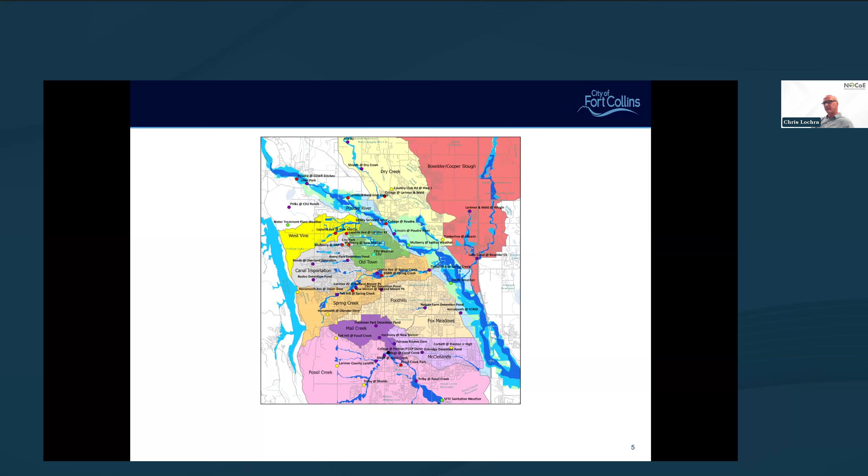Old Town had most of its natural drainage obliterated during its history of development, so we experienced quite a bit of flooding from that lack of natural drainages. Spring Creek suffered our greatest flood, sort of a modern record as far as life safety and damage is concerned. Next slide.

Just some example photos here from recent history. Old Town, the picture top left there, was a very common event for decades prior to some recent outfall construction and a $35 million infrastructure project for the collection system upstream of this area. Commonly flooded. Pretty much every rainstorm dropped something that would collect in Old Town, and this was the era of sandbagging and dam barriers for basements and lower level structures.

Then we're subject to lots of other types of events. As we enter the spring here, there's potential for rain on snow, which can trigger flooding very quickly for us. And we occasionally have events during the summer. We had an intense rain and hail combined event where the hail shredded vegetation so severely it blocked our collection system. Those are actually piles of hail you see in the bottom left-hand corner there. So we occasionally have these unique storms. Our design storm is a 2-hour event, front-loaded, 3.67 inches for our master planning efforts. Next slide.

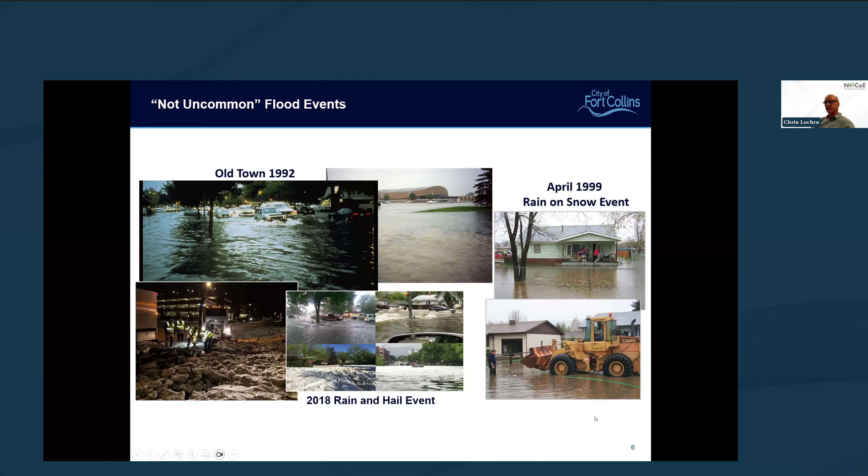Our significant modern flood was the 1997 Spring Creek flood. This was a year's worth of precipitation falling in about 31 hours from a cell that stacked up on the flank of Horsetooth Reservoir right at the top of the Spring Creek watershed. This resulted sadly in 5 deaths and ultimately $200 million of damage. And we had no alert or warning system at that time.

The National Weather Service radar underpredicted that storm's depths by about half, though they were very accurate for other cells that developed in this overall event up and down the Front Range. Droplet size and some other factors confounded their estimates. So it was determined we had to get some real-time measurement in, and in 1999 we started our effort to grow an alert system. Next slide, please.

In 2013, we had a major riverine flood, and this followed fires in 2012, where a good portion of the lower mountain watershed burned. We had terrific amounts of debris in our channels all through 2012 and into early 2013. Then an unusual set of meteorological circumstances resulted in lots of flooding from Golden, south of Boulder, northwest of Denver, all the way up the Front Range, with the smaller communities in the foothills devastated. There were road closures and damage to structures. We had to do realignment of Highway 34 in the Big Thompson Canyon.

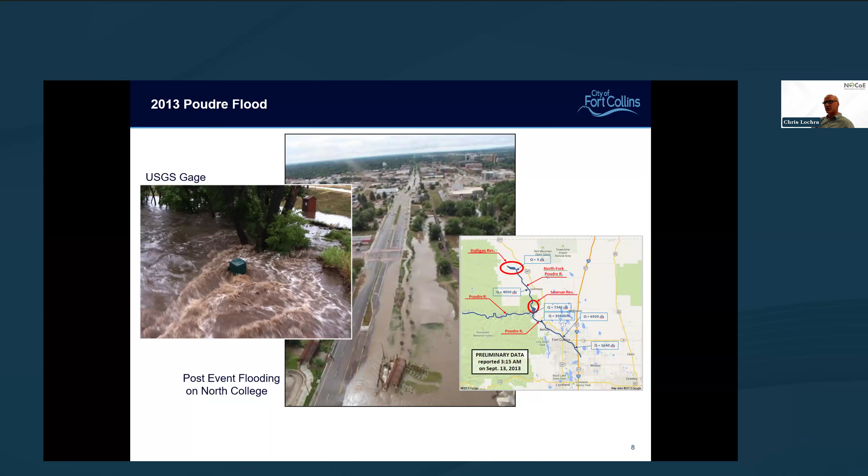This was a major flood that in Fort Collins we actually prepared for. We had an exercise in the spring because of the concerns about debris and the augmentation of flood flows. We exercised this with a multi-agency effort gathered at our performing arts center downtown, and I think it served us pretty well for the awareness component for this storm that happened in September. Next slide.

Then in 2020, we had very significant fires in our mountain watersheds. Pictured here is the footprint for the Cameron Peak fire extending from the Continental Divide on the left all the way to the Front Range here. Superimposed on that are the 2012 fires of Hewlett Gulch and High Park that you see in darker shade. About 70% of our mountain watershed is now in a fire recovery situation.

I might add, the East Troublesome Fire, not pictured here, flanked this fire to the south, extended over and threatened Estes Park and Rocky Mountain National Park. Combined, the 400,000 acres burned are the largest wildland fires recorded in Colorado history. Next slide.

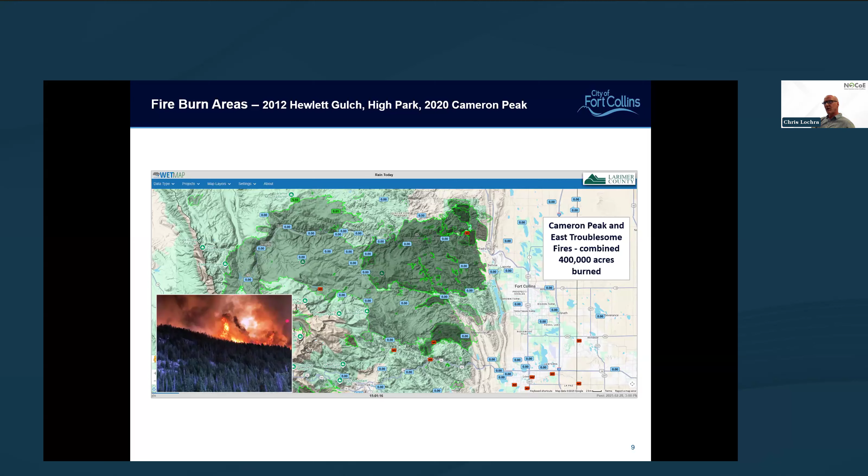Those fires drove significant changes to the behavior of the mountain watersheds, and we worked with the National Weather Service to raise the sensitivity of the triggers for any advisories, watches, warnings for flash flooding in the mountainous part of the watershed, all the way up to just a third of an inch in 15 minutes and half an inch in 30 minutes.

And from the burn area assessment reports that came out after those fires, we saw 10 to 30-fold increases, depending on the size of the subwatershed, in the peak flow expected as runoff, and it doubled for a 100-year event for the overall watershed. So that would mean instead of about 13,000 CFS, we expect in the low 20s for a major event over the burn scar.

So how do we measure these things? Well, as you'll hear from other speakers and through the series, but certainly today, we have an alert system that was started in 1999. We have rain and stage measurements on all of our drainage features, including detention ponds. We have a number of irrigation ditches we have to monitor that can translate water from one subbasin to the next. We also have some automated functions.

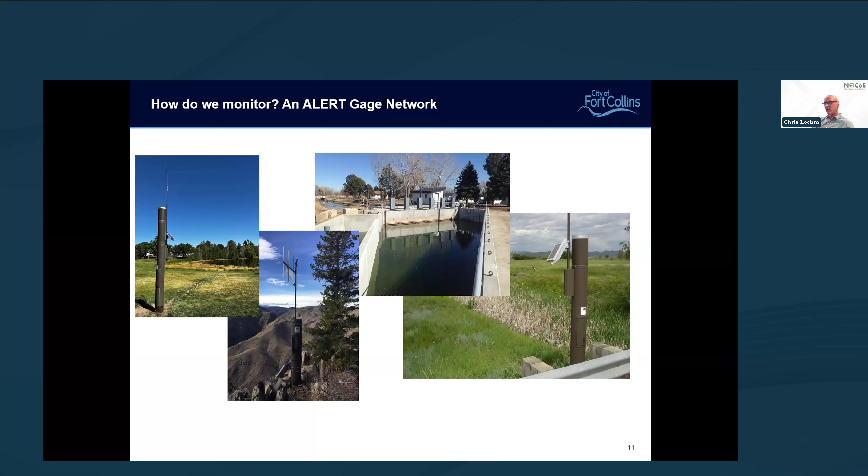And we also extended the early warning part of the early warning system approach or philosophy. I put some gauges into the mountain watershed that the county now, after the fires, has extended much farther up, all the way to Cameron Pass. But that meant putting in some repeaters because we still have basically a radio telemetry for most of our system, a couple of major repeaters, and then probably over 100 gauges now between the county and the city. Next slide.

So how do we prepare for our storms? Talking mostly today about our process. We rely heavily on the National Weather Service. We have an intimate relationship with them. This is a picture of a little tour we did to the Boulder Forecast Office. We can call them obviously during events. They receive our alert data, so they can truth their radar against the measurements from our alert system.

They scheduled Monday morning briefings immediately after the fires. They were weekly through the summer for advance notice to our emergency managers about conditions from the burn scars, since we have emergency managers from Estes Park and the various counties, including Larimer County and Boulder County and Grand County as well, Jackson to the west even. So this is a very good service they offer us.

We also look at the flood threat bulletin the Colorado Division of Water Resources offers. That's some probabilistic modeling we can look at for expected precipitation totals, sub-kilometer kind of resolution. That's very helpful for us. That's published in the morning, beginning May 1st, and then updated in the early afternoon, which is important for us because a lot of our storms develop in the afternoon. Next slide.

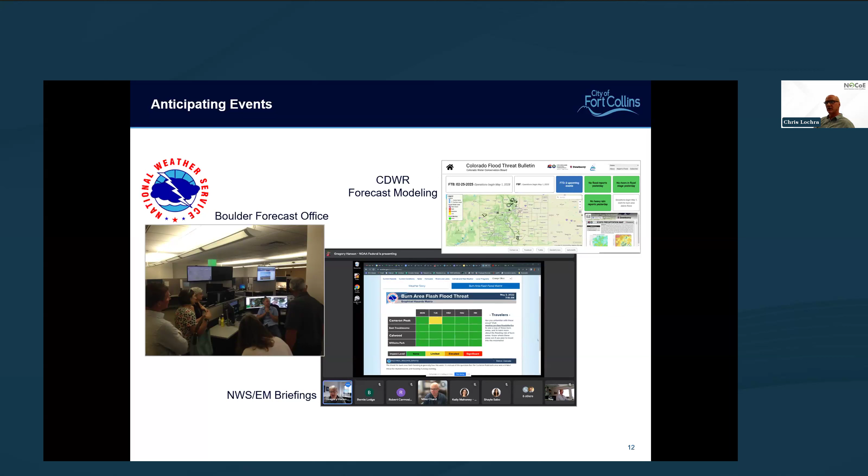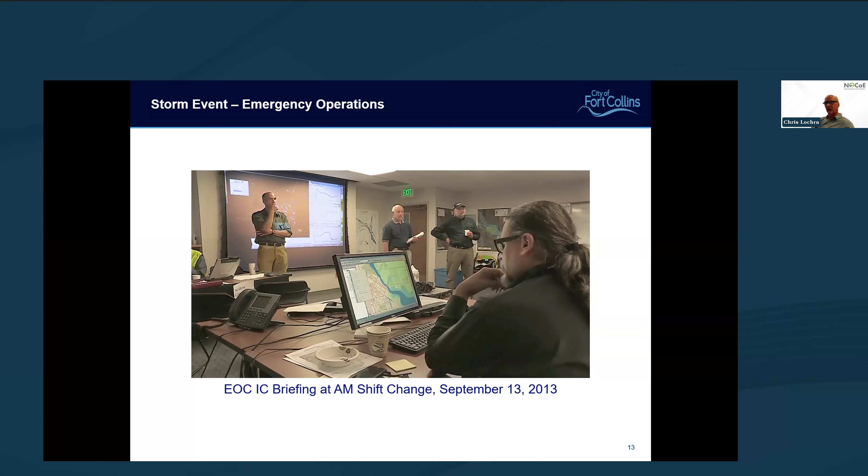Then we can stand up, as this is a shot from 2013, a physical incident command post or EOC. We have permanent ones, and we now have one located downtown under our city manager's office; we moved our emergency management representation out of Poudre Fire and into a civilian department with the city. But we'll stand up a physical DOC if given enough time and severity of an event, and duration, obviously a big issue. But we work virtually prior to co-locating physically. And I'll talk a little bit about our flow process. Next slide.

The software we use is Contrail. That's the data management software we're using, and we have some dashboards set up for displaying severity of alarms for various sensor types. And then we can overlay some weather radar imagery, some reflectivities, over that to corroborate storm behavior with stage or rain totals.

And then we rely on some other software for more up-to-date sweeps. We use Weather Sentry for a pretty up-to-date, no more than 5-minute delay radar sweep of development through town here. And we use Weather Message to capture those National Weather Service bulletins and messages and to distribute those to our emergency responders. Next slide.

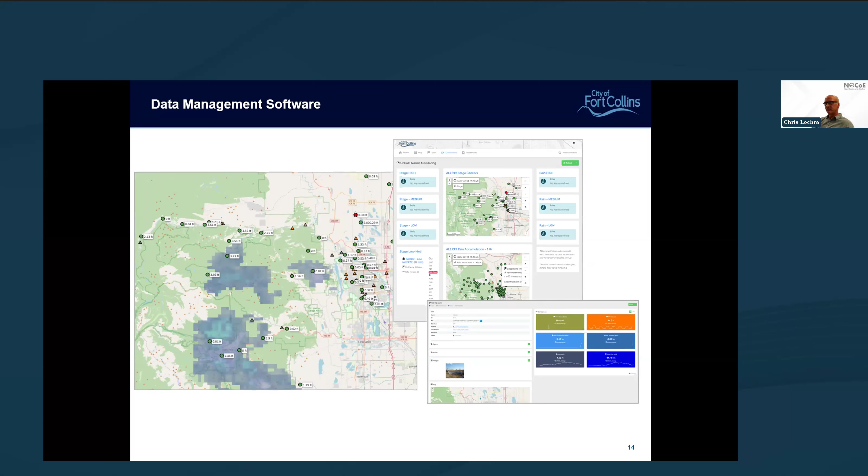And that person is the point person for receiving any kind of messaging from the system. And then they will work directly with water field operations crews here in utilities and deploy them as needed based on action items from our emergency action plan.

And then we can expand that process, that arrangement, that structure, of course, as the severity grows or duration lengthens as needed, and we can pull in leadership and management to actually manage as we break into, say, multiple crews and deploy more resources to the field, and then delegate more of the expectations and requirements of the on-call person or the incident commander initially as the storm develops.

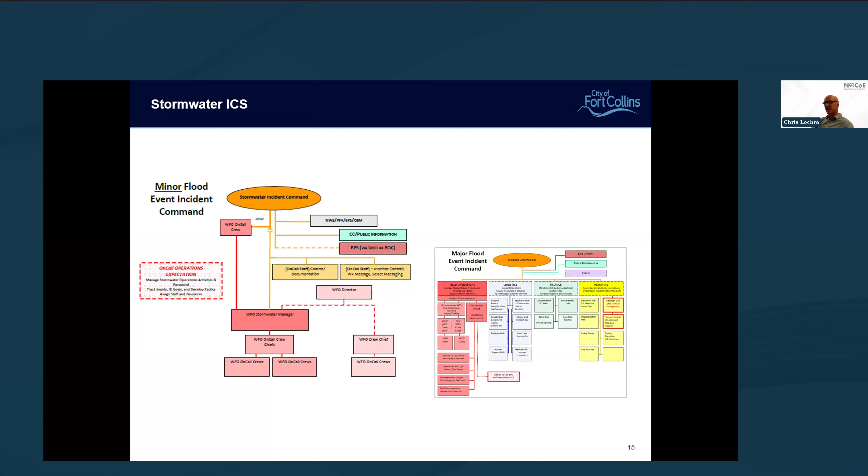And then I've got a picture of sort of a fully fleshed out ICS chart. We've all seen these. And in this case, the stormwater group that we're in, the on-call group, will be moved into a field operations or the operations section for a larger event, with also a footprint over in the planning section for development of an incident action plan. So this is kind of a dynamic, flexible approach that we use. Next slide.

We have emergency action plan links to those. We also have a couple of levees in town we have to maintain and monitor, one protecting an older, low-lying part of town, another protecting our water reclamation facility. And this book contains essentially all the reference information for flow in the river, timing.

We have bridge infrastructure information there, and we have access to prescribed polygons that we've established for notification should we need to push something out for flood polygons in various areas that are subject to flooding. Next slide.

Can't stress enough, we're all aware of the importance of our relationships with other agencies. You know, we work closely with the other departments, streets, our parks. They all have their own call teams. They have rangers and they have on-call streets. So we'll work laterally with those groups for any kind of response operations. We have our Customer Connections group.

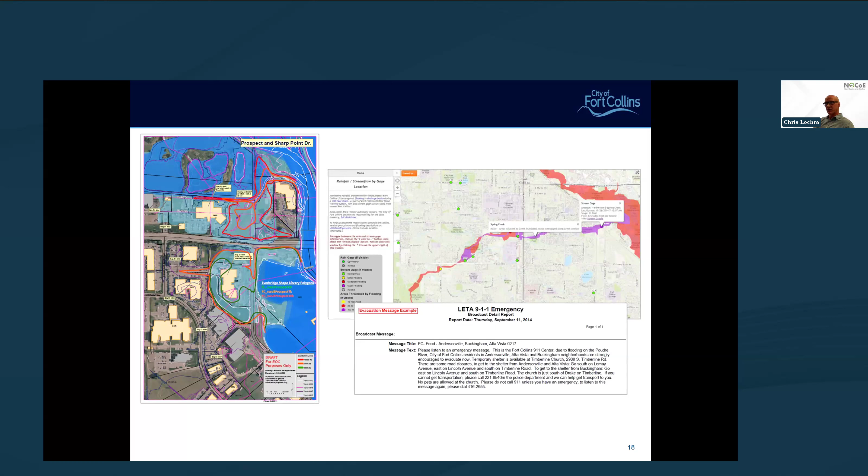And that has polygons that will automatically populate given significant flooding, that shows both Spring Creek and the Poudre River being activated. This is just a test shot, so to speak, I think for our CRS documentation. This wasn't a real event. And then the crafting of messaging. Like I said, we have most of these things pre-prepared. They'll be looked at and breathed upon, depending on the event. We're trying to basically reduce the response time, get things out as quickly as possible. Next slide.

Then we have graphics, of course, we capture the radar reflectivity, radar imagery, and our rain totals, and any information we can compile after the event for after action review, and then summarize that as a freestanding document. Or sometimes if it's just small events, I'll summarize them in an annual report that I'll publish for the water year, and include in that how our system performed and documentation on the data itself and some analysis, and then also sort of how our on-call team performed and how our response went for these events.

So that's the core of our deliverable as far as our process for the city, as far as what we offer in our flood warning and flood management program here.

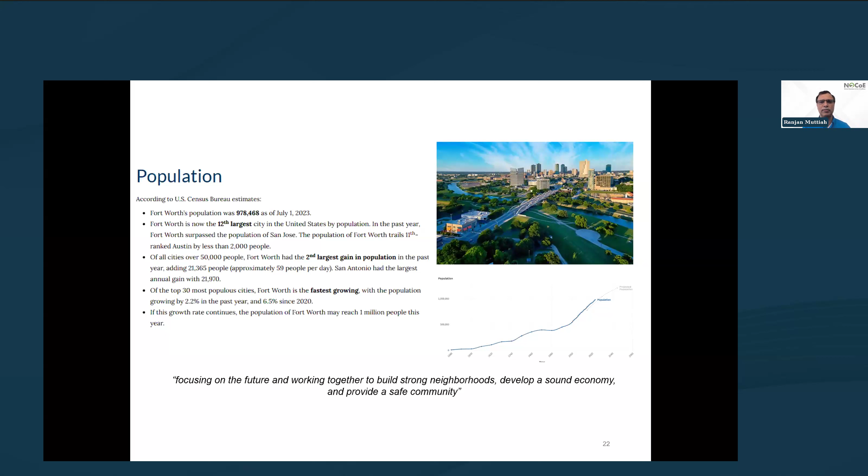One of the visions we have is to make Fort Worth a safe community. So flood safety is also an important part of safety in the city. Next slide.

So our stormwater utility, which funds my position, was formed as a result of severe flooding in 2004. This was a citizen-led initiative. There was chronic flooding, and then the utility was formed in 2006. The utility is funded by the impervious cover.

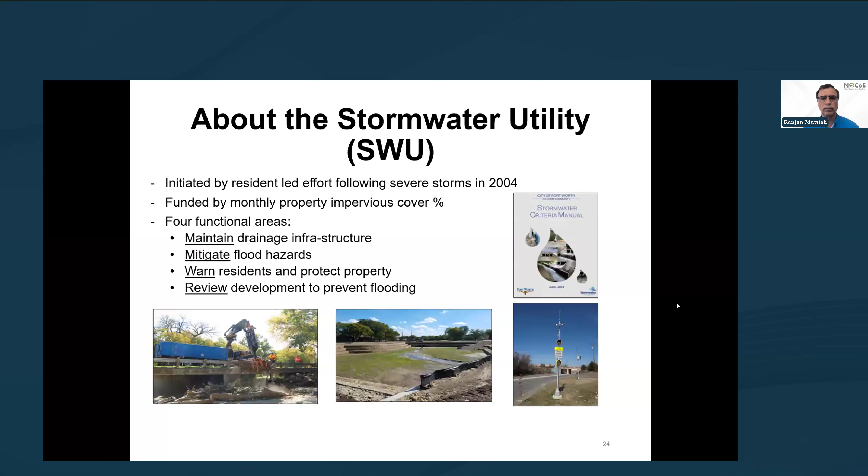So a short history. Since about the late 90s, we've had about 20 fatalities. Nearly all of them have been road fatalities related to floods. And so in 2000 to 2002, we had 3 fatalities that led to 3 test locations. Those were funded by city funds. Then in 2004, the one that I referred to earlier, we had more fatalities. We installed a flasher network through city bonds. And then we located these sites based on prioritizing all the hazardous locations. We prioritized up to 285 from 1,500 locations.

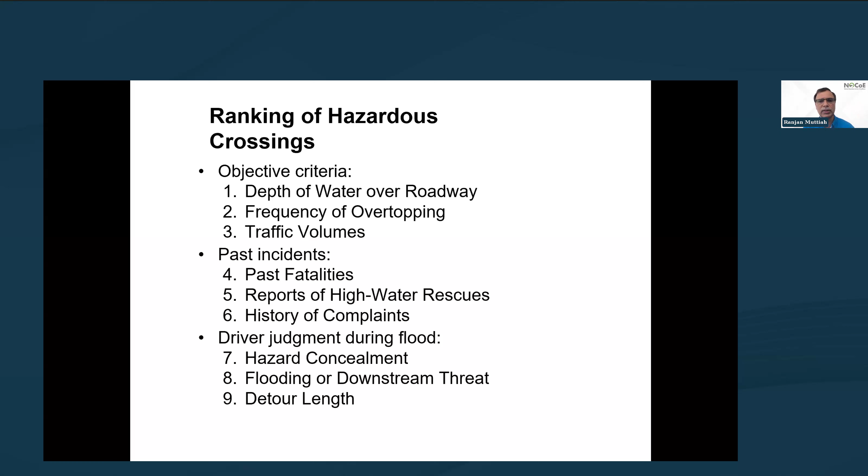So around 2018, we kind of did a reset and looked at our flood warning network and how we could improve it. One of the improvements that we made was to upgrade from Alert to Alert 2. I'll briefly mention that later on. And then we also looked at what we really need in terms of getting an early lead. And one of the things that we identified is we really need a good rainfall observation network, so we can capture that rainfall intensity as it's occurring, and then also use that rainfall perhaps to nowcast into the future, so we can understand what the flooding would be based off of the rainfall intensity as it's coming in, and then also use that rainfall to bias correct radar products. So that was one of the missing points we identified in 2018.

So we reset, developed a master plan, and three of the things that we identified were that we wanted the system to be reliable, resilient, and relevant in terms of getting the information out to the residents, to the driving public as much as possible. And we still have a long way to go on that relevancy part, and we are working hard at it. And I'll provide some information about how we're trying to get the information out to the driving public.

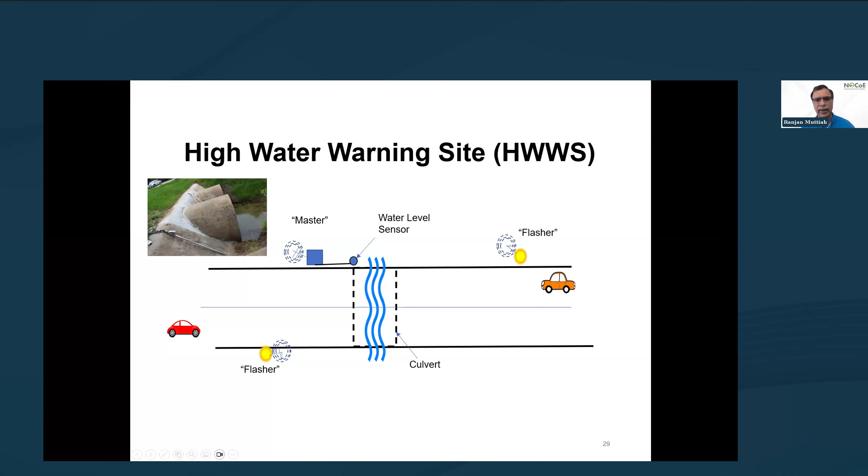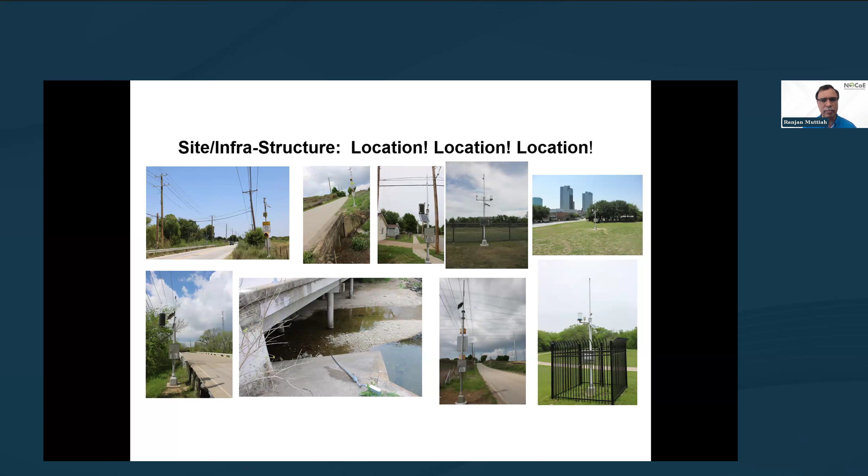And then on the left side, you can see this one over here. If my mouse shows, you can see one of the tipping buckets installed alongside one of the remotes that I was talking to you about, so that the remotes can be instrumented as well. Next slide.

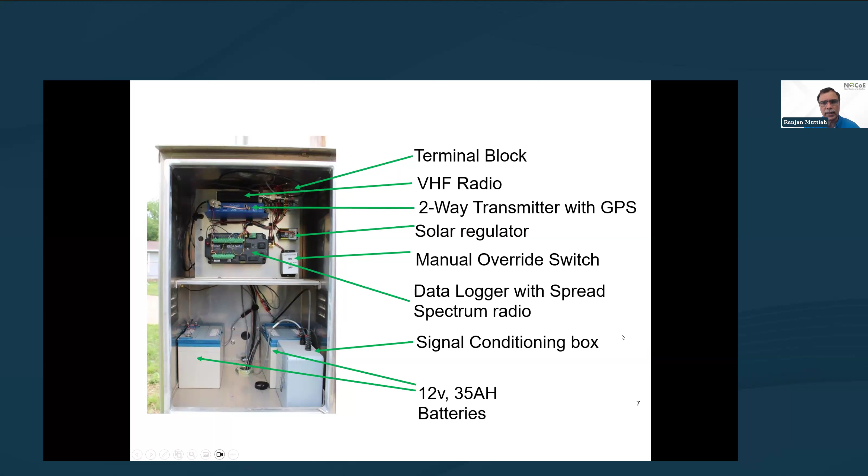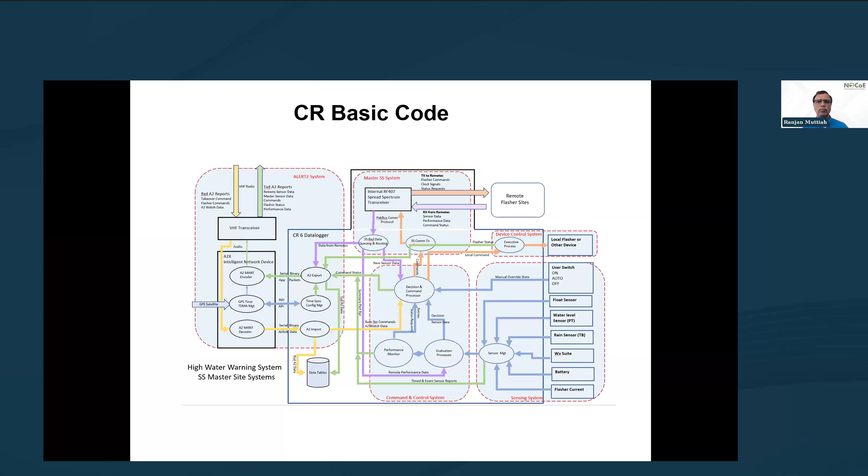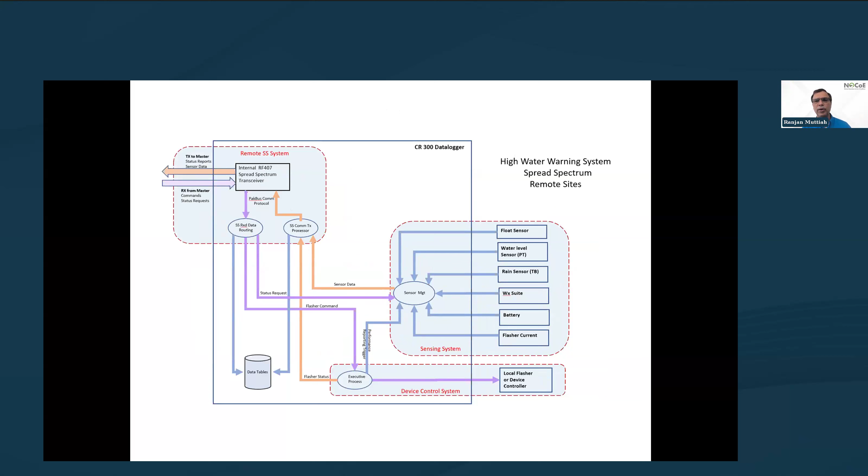So this is the same thing. The earlier one was for the master. This is what is in the remotes, a simplified system. But even the remotes, as I mentioned, on the right side, you can have data coming in from sensors, then that collects it, and then the communication is through spread spectrum radio frequencies to the master. Next.

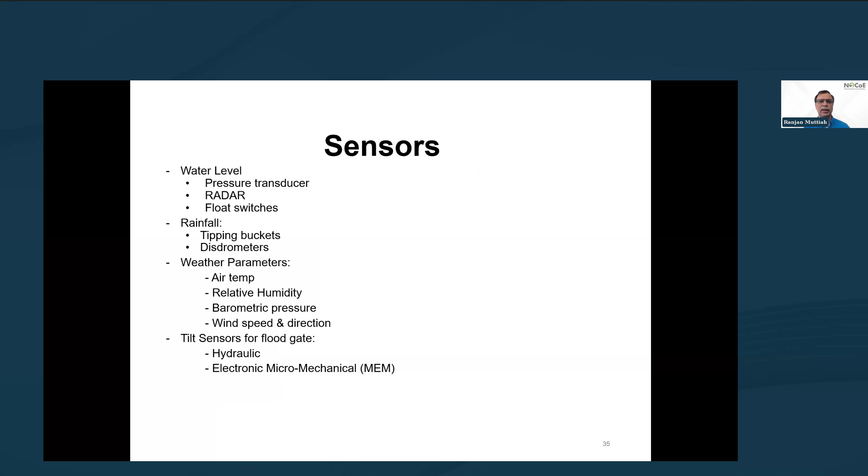So just kind of a menu of the different sensors we have. We have pressure transducers, radars, float switches, rain gauges. We've got disdrometers. We measure weather with dedicated multi-parameter weather sensors. And then we also have one site where we have a flood gate that deploys whenever there's a flood. So we have tilt sensors on those. Those have hydraulic tilt sensors as well as MEMS tilt sensors on them. Next.

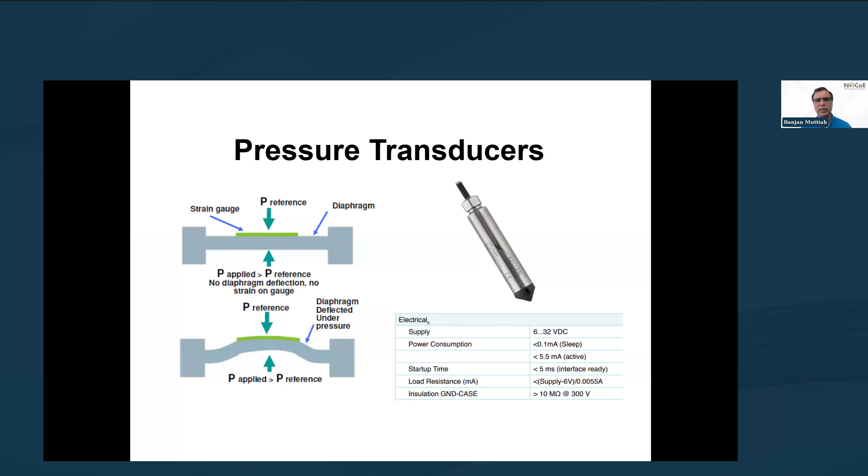We use a Keller unit. And these have, again, got to be maintained regularly. I won't talk about maintenance, but all of these systems have to be maintained. Okay, next one.

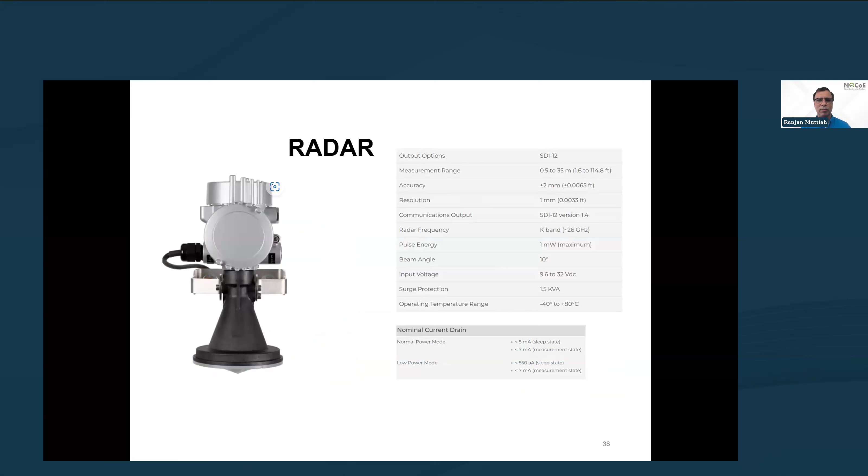We also use a radar unit. These are particularly useful on bridge decks, when you have a lot of freeboard from the bridge deck down to the water level. These are great for that. One of the drawbacks is that you need water. It doesn't work too well on dry land. So you need to have the continuous water buildup as the flood is taking place. Next.

I think all of you have seen tipping buckets. So that's another way we measure rainfall. The disdrometers are co-located with these tipping buckets. So that's a nice way of checking one against the other. We use the disdrometer also as a way of QA/QCing the rainfall. Next.

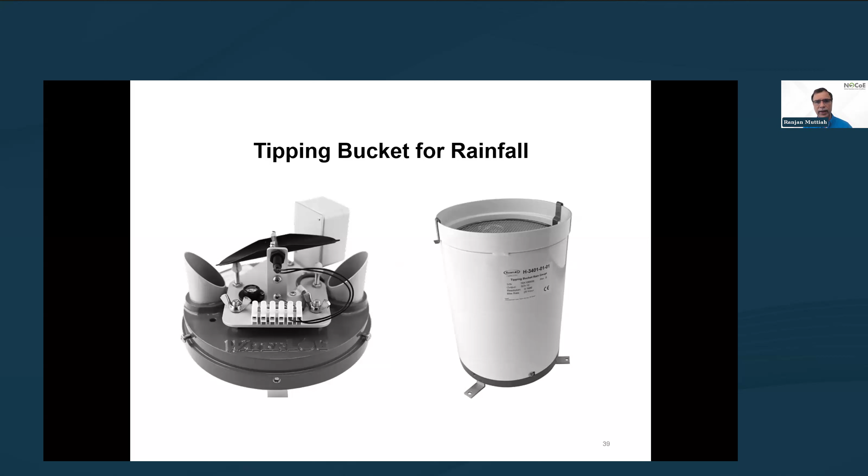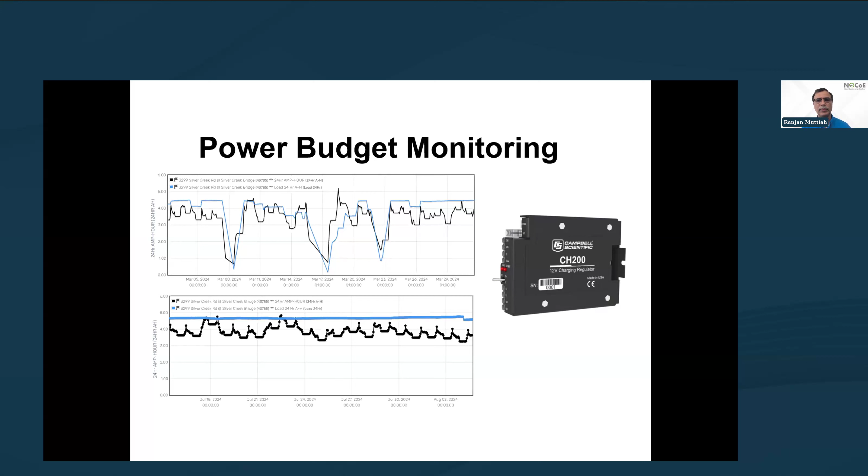We also, not everywhere, use these intelligent devices. This is a Campbell Scientific device to monitor the power budget. Very important, especially since we are solar power dependent, to make sure that the power budget is adequate. And you can see in some cases it is, in the bottom graph, in some cases it's not, in the top graph. And so we have to figure out, do we need larger solar panels? Maybe there's tree obstructions and things like that. And all of this is telemetered in real time. Next.

And then during the event, at least from the flood warning side, there's really not much we do other than just if there are any down sensors. We also have cameras at some of these locations, so we kind of dynamically monitor the situation. If a sensor goes down, we communicate to our field operations to use the camera system in case of need.

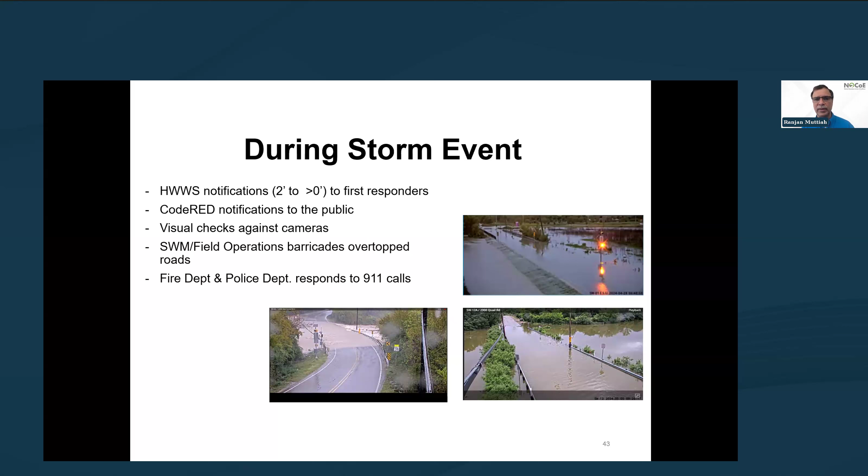These are dynamic things that go on: field operations barricading roads, and then fire and police responding to 911 calls. At some of the bigger flood locations, we do have dedicated high water rescue teams that pre-position in case of rescues that they have to perform. Next.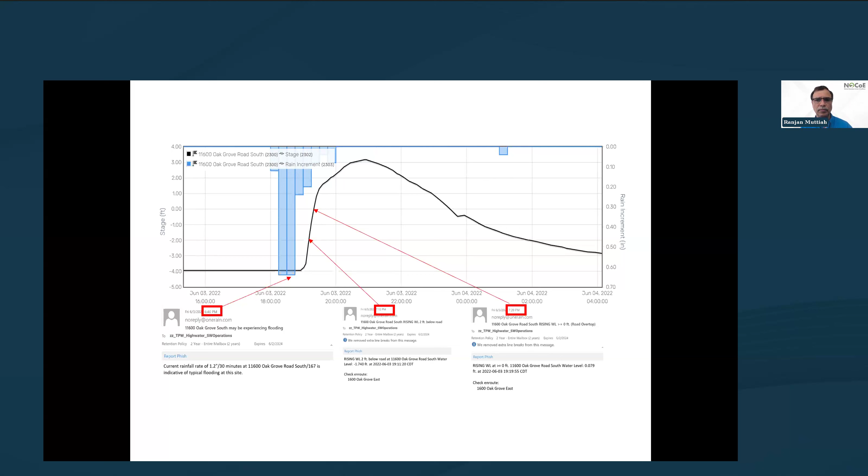But that rainfall information also is broadcast to the first responders, and currently we use the rainfall intensity to give them a heads up in terms of how severe the storm will be. Next. So just quickly, next steps. I think I'm getting close to running out of time, so I'll go through this quickly.

So what we're doing right now is looking at these low water crossings, developing what we call threshold curves. The question is, what rainfall leads to an overtop? We are modeling these low water crossings with HEC-RAS 2D, developing the threshold, looking at the cumulative rainfall. So the threshold curve is dependent on the rainfall itself. And then we monitor the cumulative rainfall as it's coming through in real time and check whether it's below or above those threshold curves. If it's above, then we know it's likely to start flooding.

And then as that water level starts rising, we also calibrate these thresholds, the dynamic nature of the flood, against the water level as it's rising and lowering. Those measurements are coming in real time. So we are working on a nowcasting system, looking at the rainfall reports along with the water depth reports as they're coming in, to provide a 15 to 30 minute nowcast, a look-ahead forecast, so that our field ops can get that lead-up information. Next.

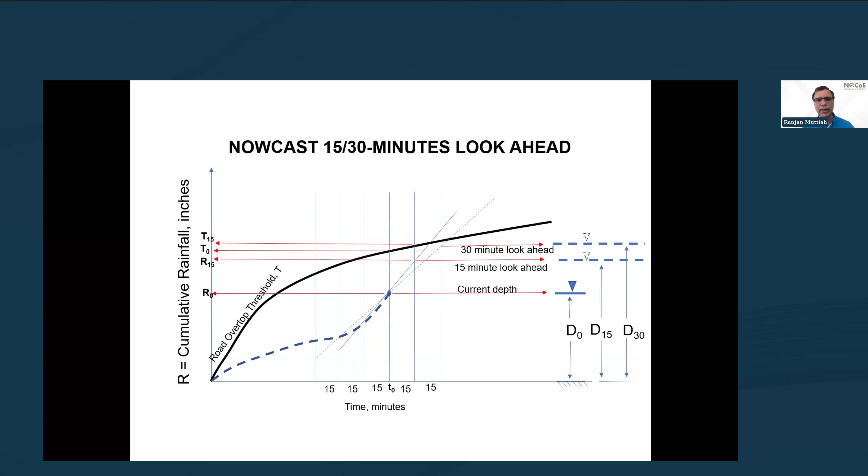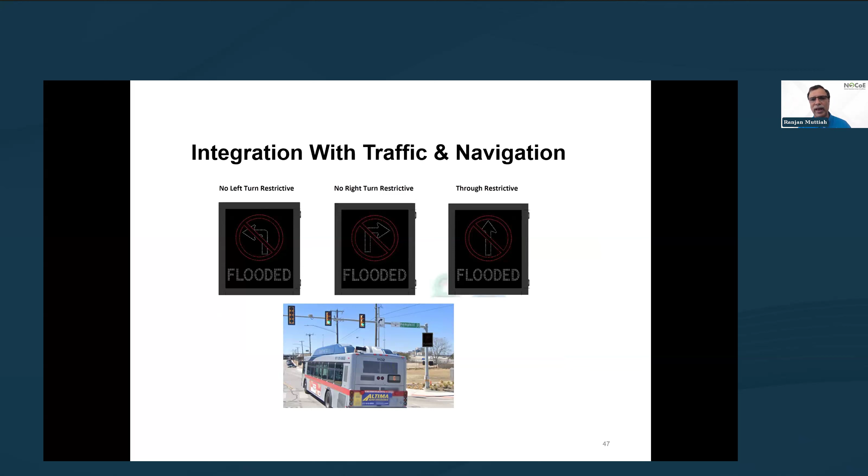The other thing we are doing is trying to reach out to our drivers. If they sign up, they can get the CodeRED notification, but we're also working on installing electronic signs at these flood-prone intersections, so that these signs would come on whenever the road overtops, to provide that visual information in addition to the flashers to help them move away from these flood-prone areas. Next.

So just to summarize, what are some of the benefits of having these systems? They provide information to first responders so that they can go and barricade the roads. Unfortunately, drivers have this tendency, even though they might know the danger, they hesitate, and then they might go through those flooded roadways. So the first responders, with the lead-up information, can use that to barricade roads. If you have communication systems in place, you can reach out to the drivers.

You can also educate the residents about flooded roadways so that they can plan ahead, since some of these storms might last only 15 to 30 minutes in terms of the intensities that cause flooding. So if they can just kind of delay what they planned on doing by 15 to 30 minutes, that would just keep them safe. And then the gauges also provide you a good return period analysis in terms of identifying areas that are flood prone.

And then going back to that HROM effort I was talking to you about, these flood warning systems serve as an intermediate measure to provide that improved level of safety at these flood prone locations until you can construct expensive projects. And then you can use the data for nowcasting, provide some lead time.

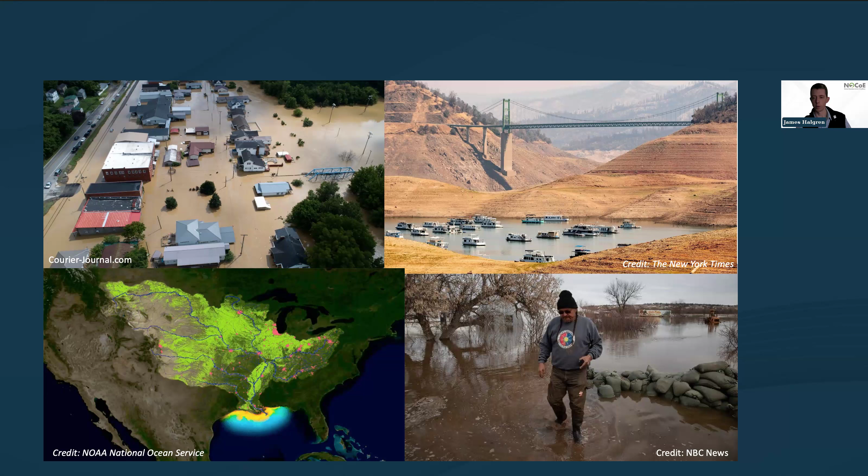And our goal is to make sure that when we give something that's a research product over to our operational partners, that it's something that's useful not just to them, but useful for them in their communication so that they can actually do something that has an impact for an individual that's trying to make a decision whether or not to walk in water, drive around water, etc. The idea is really cool.

The classic divide is a critical thing. I'm in a university research building, and I have an office, and I come up with really good ideas, and they all work every time in my little research watersheds, and there's this giant divide over to the real operations. You know, the places where data doesn't come in just right, hasn't been QC'd in the right ways, where there's questions that we haven't considered.

And the goal is to bring together the operations and the research folks through this Cooperative Institute and see if we can't accelerate some communication that will help things out.

This is me right here. I'm literally just inside of that little window right there. And we are co-located next to the Hydrologic Instrumentation Facility. Every USGS gauge that's being used today is going to be, this facility was just opened and they're now transitioning over here from their older space at Stennis Space Center, is going to be tested here. And if it breaks, it comes back here to be recalibrated.

And then the operational component of the Office of Water Prediction at the National Water Center is housed in a building on campus here. And we're working with them to improve the prediction of flooding and water resources across the country at a high resolution. So the co-location here is hopefully accelerating those things. We take advantage of it and have meetings and talk with these guys actively.

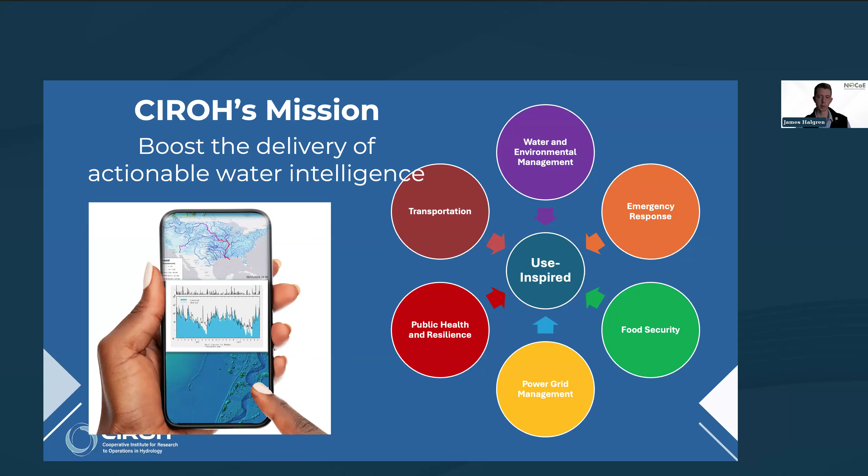We have community water modeling development, which has to do with improvements to models. So somebody that has a new way to model water would be attached to our first research theme. The groups that are bringing together many different pieces to simulate large systems and bringing in the observations that are associated with those large systems and doing the data assimilation, that's our second research theme. So our direct connection to the National Water Model, for instance, is through this research theme 2.

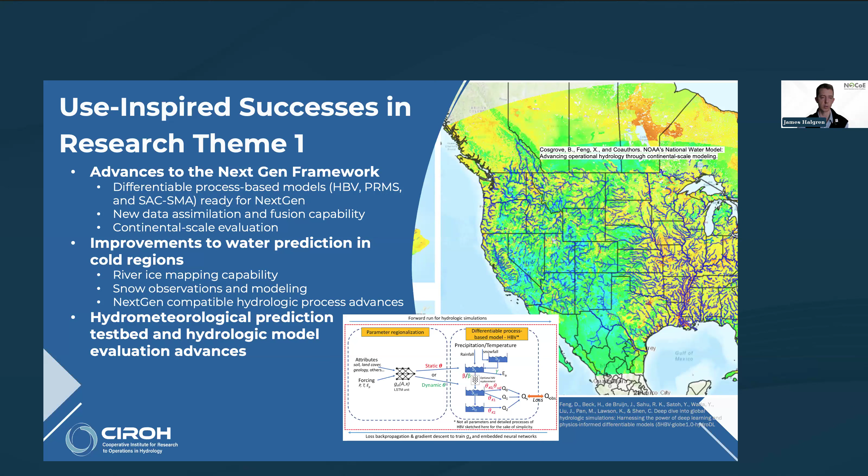And we're expanding that; a group at Penn State University has done some significant work advancing that. We also have a group from Stevens Institute in New Jersey that's done a lot of work with ice and the ability to model for the northern regions what will happen. How do we predict the flooding and impacts associated with ice jams in rivers and the timing of their breakup, using pretty amazing remotely sensed information to predict and manage those situations.

Research theme 2 happens to be one of my most active areas. We've developed a community infrastructure so that somebody can take the National Water Model and snip it out for their area and fairly quickly be running a version of it on the laptop and start to do experiments and explore what their outputs would be. A number of different additions to the framework, expanding the models that are currently in the National Water Model so we can explore what would be the impact if we transition to different types of models.

In the hydroinformatics area, we have a number of data sets. If you go to portal.ciroh.org, you can start taking a look at some of the things that have been posted so far. And as we reach our developers conference this May, there will be a number of new things posted there as we're sharing our work with each other. And then in our science meeting in October, those things again will take another leap forward. So if you are interested, you could poke into portal.ciroh.org and see some of those advances and what we're sharing there.

And last of all, our social science areas, we've been looking at the ways that these things impact beyond just the water. A number of our flood preparedness initiatives and resiliency initiatives in a number of areas, especially in the Mississippi River Basin, and the impacts that those things have on actual people when you integrate the National Water Model into planning, which is one of the big studies that we've been working on.

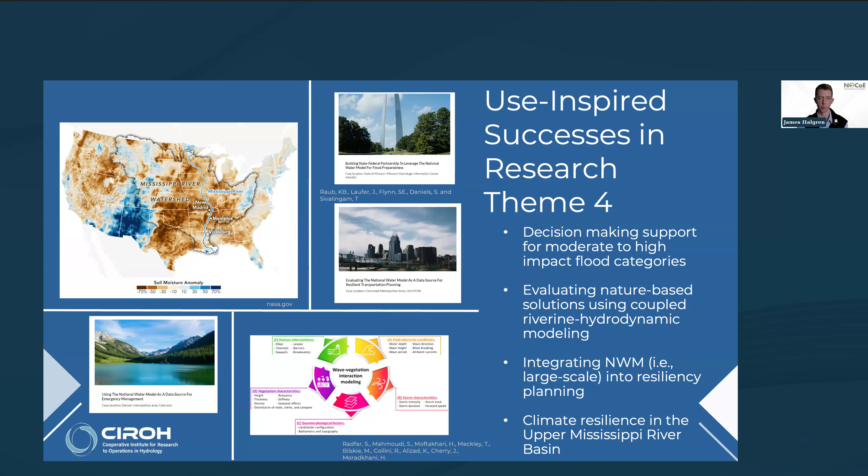What do I do? My group is in charge of docs.ciroh.org, where we document in a very straightforward and constantly growing way the capabilities that we're building out as a CIROH organization. Go ahead and check it out.

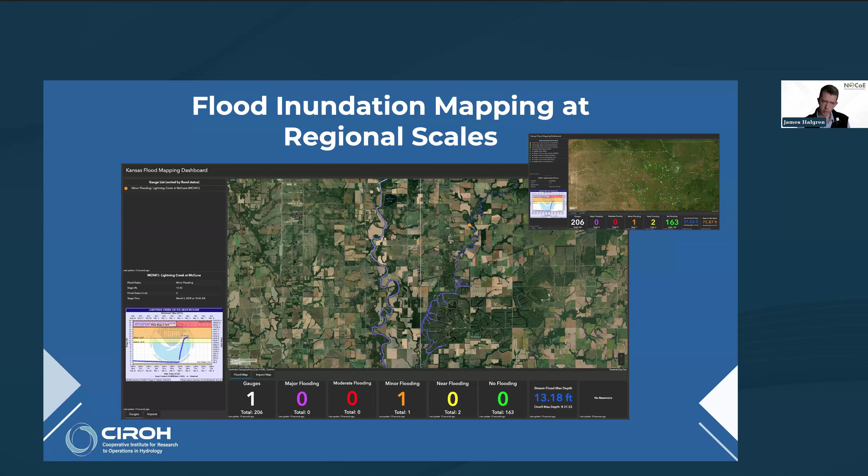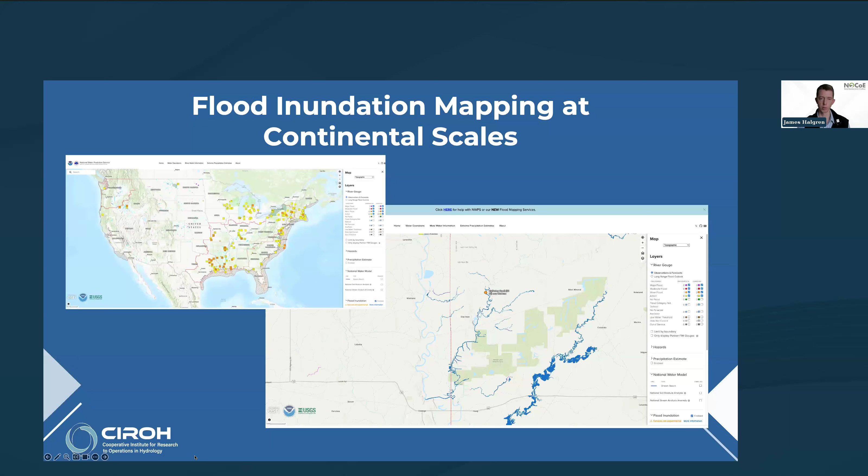I am part of a group that's doing flood inundation mapping work at regional scales. This is the cooperation with the University of Kansas, where they have a flood mapping dashboard right now. Today, in this very moment, there's a small amount of flooding on this river, the Lightning Creek at McCune. That same flooding is modeled in the National Water Model's flood inundation layer, which is a recently released capability from the National Weather Service. Hopefully in part 2 of this webinar, we'll get to hear more from the team that's producing that. But we are part of the research group that's looking to advance that with some of the techniques that we're developing here.

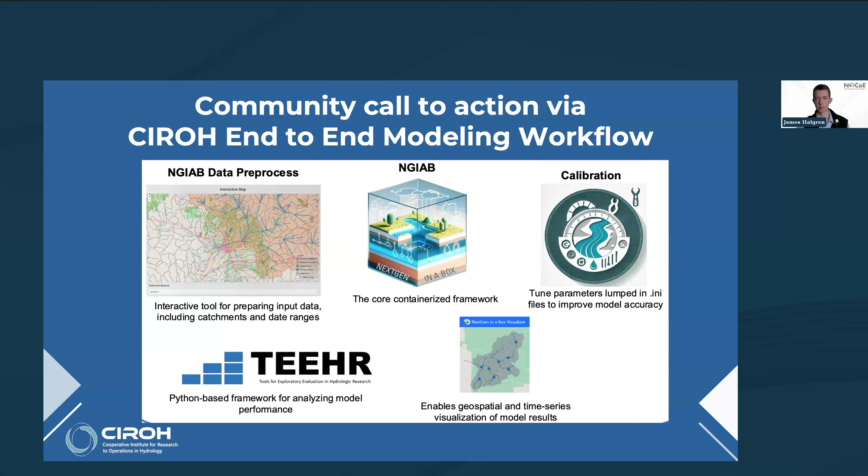As I mentioned, I work with the capability to help people get into using the National Water Model tools. We've developed what we call NextGen in a Box. So the NextGen National Water Model, or the NextGen Water Resources Modeling Framework. We've containerized it, and we've got a workflow that if I sit with you, probably within about 5 minutes, you could be simulating the water flow in your watershed just with a few clicks. And then you could go from there to see what you want to experiment with and adjust and try some new things. That won't take 5 minutes, but I can promise we can get you started in 5 minutes. That's our commitment.